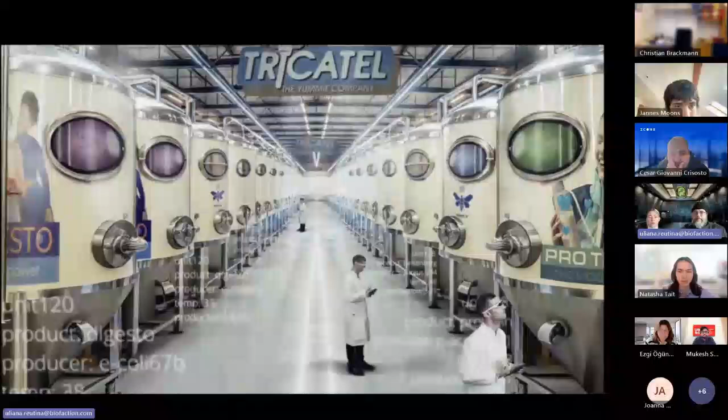Usually the fruits came in from rogue nations outside the Nogan Treaty, like Hungary and Italy. Most of the stuff was canned or in some way processed. In some rare cases, we found fresh but tasteless fruits provided by some clandestine indoor growers in the neighborhood. There was absolutely no reason to grow these fruits. Our solar food program could perfectly provide all the nutrients and proteins using efficient fermentation techniques and return wasted farmland into precious nature reserves.

People could eat everything in any form, but some people still insisted on the real thing, so much that they became criminals. Enforcing the Nogan Society kept us busy for almost 20 years. Spotting secret plantations via satellite, surveying smart meters and solar panels to find the indoor growers. A time-intense but mostly successful endeavor, until this very special day.

All of a sudden, they were found on every corner, fresh, tasty fruits that were exposed to a microbiome. Someone out there was growing them in real soil and in vast numbers. We were checking satellite data, smart meters in every house, dugouts at cemeteries. Nothing. A little later, with the help of our sophisticated interrogation techniques, we finally found out that all of it was closely related to a public laboratory.

Their clients came from all traits of life: academics, workers, artists, even politicians. The place was run by a group of former scientists, life science, agriculture, most of them without jobs since we went post-vegan. They called themselves, and what they did, Mi-Hy.

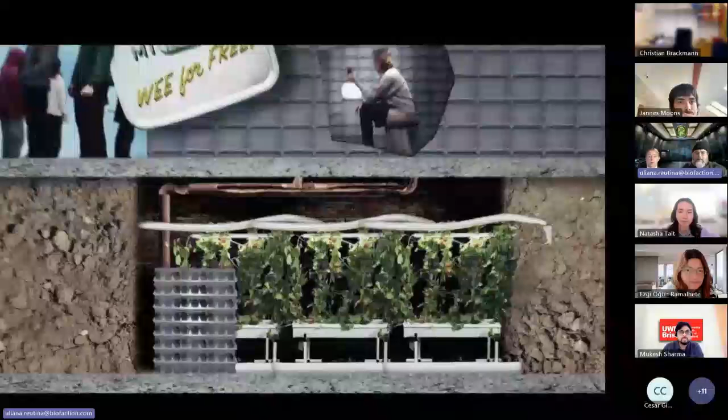We had to raid the place. Their hydroponic underground system was the most sophisticated our department had ever seen. They had created a microbial fuel cell that was able to make electricity from urine. Moreover, their bacteria digested the wastewater into nutrients to boost plant growth. Everything was transformed into a valuable resource.

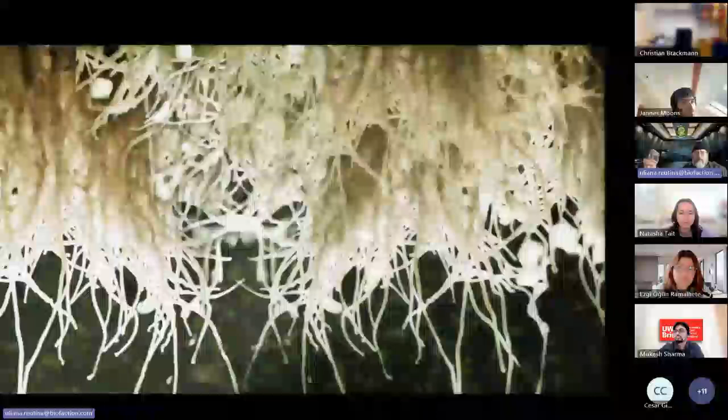We found out that they had totally fooled us. Due to the taste, we had been looking for someone growing plants in soil, but they had established a root microbiome within their hydroponic system, giving their vegetables a natural taste. A great success for our Nogan task force, we thought.

But as you know, lawyers. In court, they argued that due to the fact that their hydroponic system did not have any impact on the environment, it could not be seen as a violation of the Nogan Treaty. They came free.

Today, they are making a fortune, turning sewage sites around the world into organic restaurants. Having the illegal vegetables issue solved by Mi-Hy, resources are free for our task force to combat other crimes, yet unknown to mankind.

I hope you've been intrigued.

Let's get into details. First, we invite PhD candidate Natasha Tait, who is an expert in MFC technology. Natasha, what are these MFCs and how do they work?

Natasha, we seem to have some troubles with the sound. Do you hear us? We don't hear you. Are you able to hear me now? Yes, now it's fine. Thank you. Sorry about that.

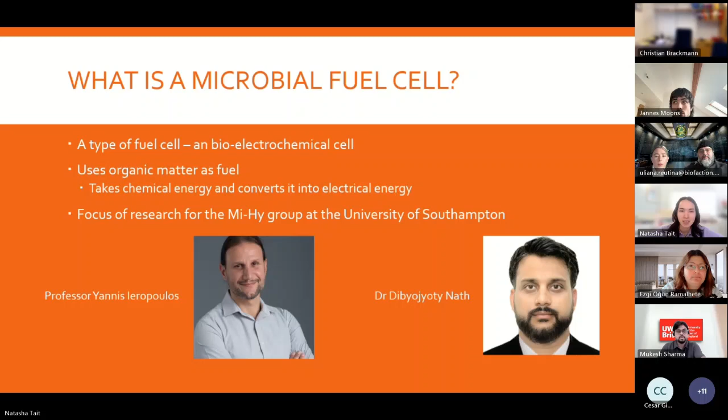To begin, the first MFC was written about in 1911 when Michael Potter showed how yeast can break down organic matter to produce electricity. He wrote: 'The evolution of caloric energy during fermentation or putrefaction is commonly recognized, and that electrical energy is also liberated during these processes is a conception of considerable interest.'

So today, more than 100 years later, a potential large-scale application of microbial fuel cells is in wastewater treatment. The idea being that you can take different waste streams, such as domestic waste, agricultural waste, industrial waste, and use them to extract electrical energy using microbial fuel cells.

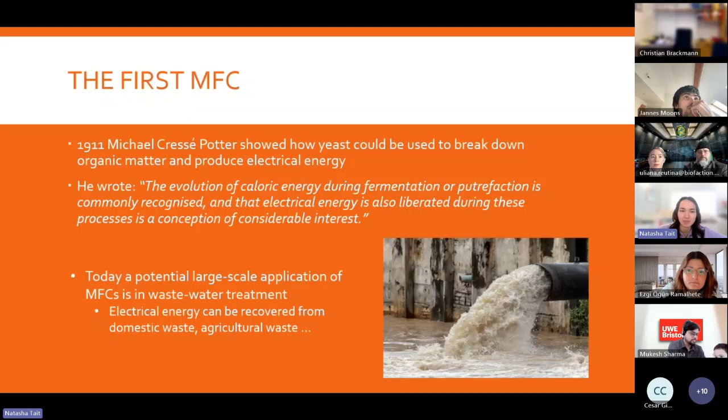So how would they actually work in SPIKA? How can they support a hydroponic plant growing system? Again, here the idea is that they will be fueled by waste, and the microbial fuel cells will generate electricity and offset the energy required by the hydroponic system, for example for the lights, the pumps, and plant health sensors. Additionally, another capability of microbial fuel cells is that they can recover compounds from waste.

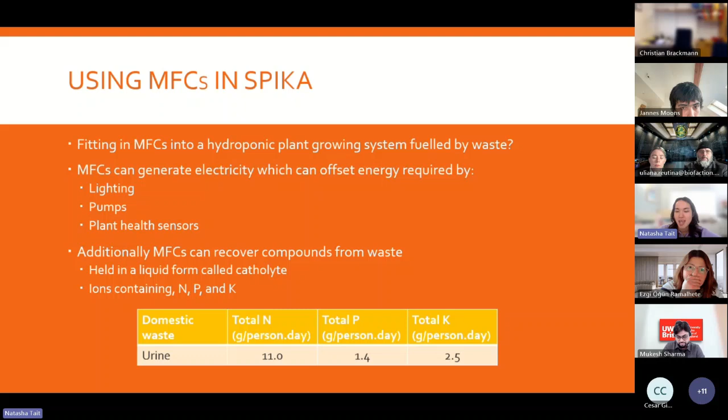These compounds are produced in a liquid form by the MFC, in a liquid that we call catholyte. We are particularly interested in recovering compounds useful for plant growth, specifically ions containing nitrogen, phosphorus, and potassium. For context, human urine per day can have up to 11 grams of nitrogen, 1.4 grams of phosphorus, and 2.5 grams of potassium.

So how does it work? How does an MFC actually produce electricity? Here on the right-hand side, I have a typical two-chambered MFC. In the left-hand chamber, the anode chamber, this will be filled with wastewater, which is rich in electroactive bacteria and organic matter. Electroactive bacteria is simply bacteria that can take an electron from inside its cell wall and transfer it to the outside.

So these electroactive bacteria are going to be breaking down all of the organic matter, producing electrons, and growing a biofilm surrounding the electrode, which we call the anode. All of these electrons that get produced travel to the other side, to the cathode chamber. This movement of electrons produces a current and allows us to power devices or store it in a battery.

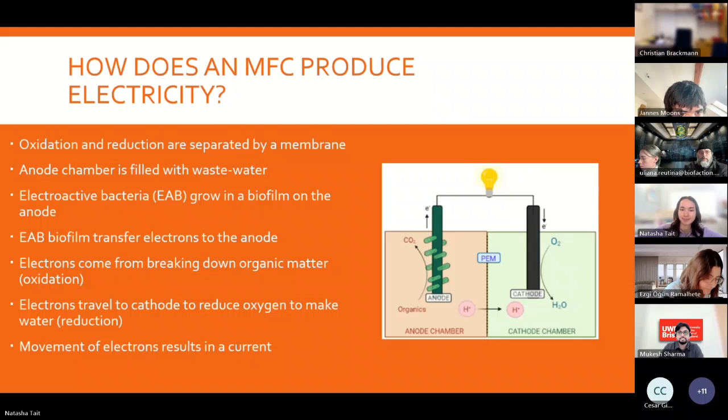So one of the goals for Team Mi-Hy at Southampton is a benchmark of producing 1 milliwatt of power per 1 milliliter of wastewater supplied to a microbial fuel cell. To do this, we are continuously developing membranes as well as electrodes. For the electrodes, we want them to conduct electricity, to support a biofilm for the anode, and be good at reducing oxygen for the cathode.

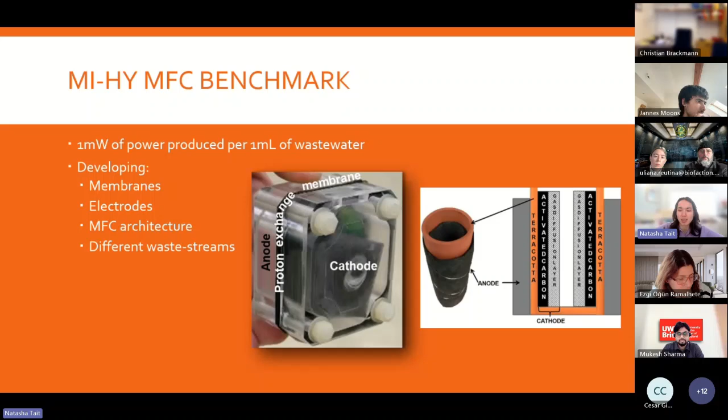And for the actual MFC architecture, we are always developing as well. In the middle, I have a typical sandwich design where there are 2 electrodes on either side of a flat membrane. But what we do in MI-HY is actually use a cylindrical design, where the whole external surface, or almost the entire external surface, is covered by an anode, and the internal surface of the cylinder is the cathode. This is really just to maximize the surface area that the biofilm will be in contact with the wastewater.

Natasha, what is this catholyte? How is it made? Is it different from the wastewater? Thank you for asking, I'll just get onto that.

Okay, so catholyte is produced because of several different processes in the MFC. To begin, charge in all electrochemical cells should remain balanced. So as electrons are moving from the anode chamber to the cathode chamber, there's also the movement of positive ions. In the picture, it shows protons, but any positively charged ions will also be moving from anode to cathode to balance the charge. Furthermore, with the movement of ions, there's also a process called electroosmotic drag, where water molecules are also dragged through the membrane. And finally, ions can also move during diffusion.

So all of this leads to a buildup of liquid in the cathode chamber, and we call this liquid a catholyte. So it is water-based and rich in many different ion types.

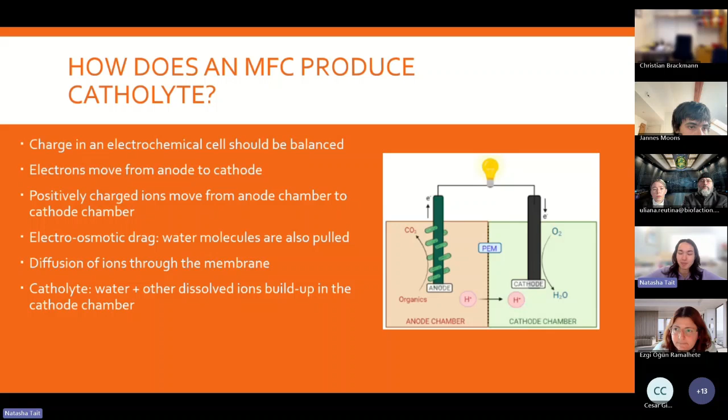In our lab, we have been experimenting with different kinds of feedstock. Here you can see we have collected catholyte taken from raw sewage, and also catholyte created from a synthetic urine lab recipe that we have. We have detected that we have managed to recover sodium, potassium, calcium, magnesium, nitrate, and phosphate.

But we still have to continue our development of membranes, as we want them to be really good at screening bacteria while also allowing ions and water to pass through. So the idea is that we can control the pore size during the kilning process of our ceramic membranes.

Another interesting property of this catholyte that we found is that it has antimicrobial properties. This is down to two elements: they can have high saline content just from the sheer amount of ions making salts, and they can also have quite a high basic pH, which inhibits the growth of bacteria.

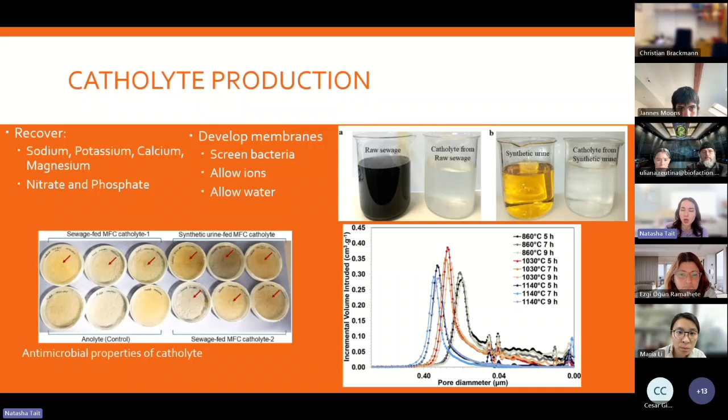Could I ask you one more question? Going back to the electricity output, to the energy—it sounds like it's a very low energy output. Is there a way to scale up MFCs to stack them together? Yes, thank you for asking.

To maximize both power and catholyte outputs, you can combine many MFCs together. Traditionally you might think, why don't you just make a really giant MFC? But actually it's best to again maximize surface area, and you can do this by combining many small cylinders together in one tray. They all share the same wastewater, but the surface area that biofilm will be in contact with increases. So in one tray, you have a lot more current being produced from the biofilm compared to just one MFC. Then you can stack many trays together and connect them in series to boost voltage and current, giving you a stacked system.

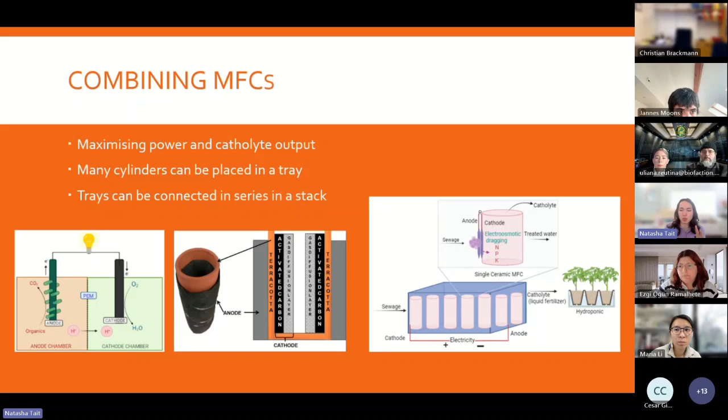You can extract all of the catholyte from the many cylinders to feed the hydroponics, and use that combined electricity to provide for the lighting.

Here in our lab, we have experimented with this. On the left, we have an example where we had raw sewage flowing down into two MFC trays, and the sewage was continuously recirculating through the two trays until the organic content had been greatly reduced. Then we start the process again and replenish the sewage. Here in the center of the slide, you can see that catholyte is starting to build up in the cylinders, so then we can extract that.

I will just show here a video also. We were able to power this 5-volt LED strip using another stack design—12 MFC trays combined together.

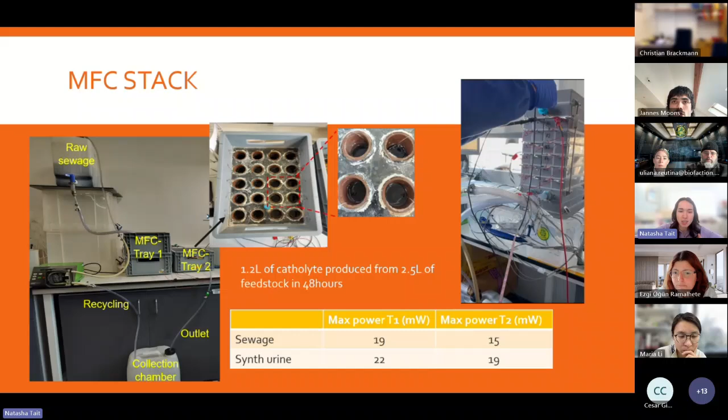Here I have some data showing that the maximum power for the trays, for the sewage-fed system, can be between 19 and 15 milliwatts. For the synthetic urine, which has a higher organic content, it's between 22 and 19. This is much greater than a single MFC, which we are aiming for 1 milliwatt. So we have managed to improve the power output.

We want to continuously improve catholyte production as well as electricity production.

So thank you for listening, and if anyone has any questions, I would be happy to answer.

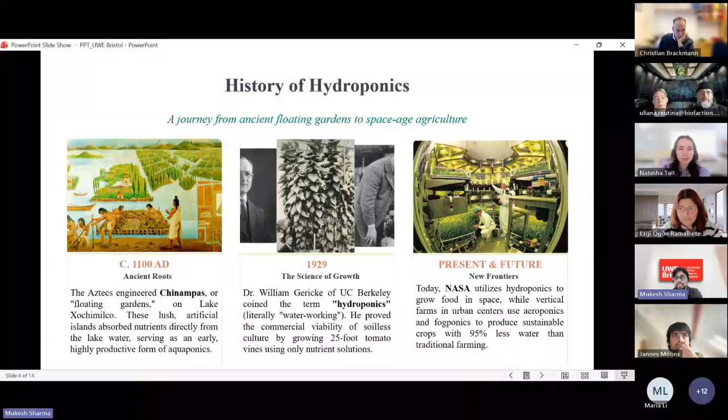In 1929, Dr. William Gericke, a professor from UC Berkeley, was the first person to coin the term hydroponics and to prove that plants can be grown commercially using hydroponics techniques. He successfully grew a 25-foot tall tomato plant just using nutrient solution. After that, there was no stopping. There have been a lot of studies by different universities and research centers, and even NASA is involved in growing plants using hydroponics techniques, to check whether this can be done in space to grow food there.

So what are the merits of hydroponics? The first and foremost important thing is water. Hydroponics makes efficient use of water. It usually takes 80 to 90% less water compared to traditional soil farming. Plants grow faster, with higher yields due to the controlled environments. The other thing is space utilization. Because it is done in a controlled environment, it uses much less space compared to conventional farming. It reduces pesticide use, enables continuous farming throughout the year in a protected space, reduces the land size and minimizes soil degradation.

So, how is this hydroponics against the principles of agroecology? First and foremost, agroecology involves soil, animals and other things. But in the case of hydroponics, it is the absence of soil, which breaks the link between the rhizosphere, farming,

and natural ecosystems. It reduces biodiversity, and hydroponics techniques involve high technologies, which is not the case in agroecology. It's a high energy consumption process, conflicting with agroecology's emphasis on minimizing ecological footprints. It has social disconnect and then nutrient cycles.

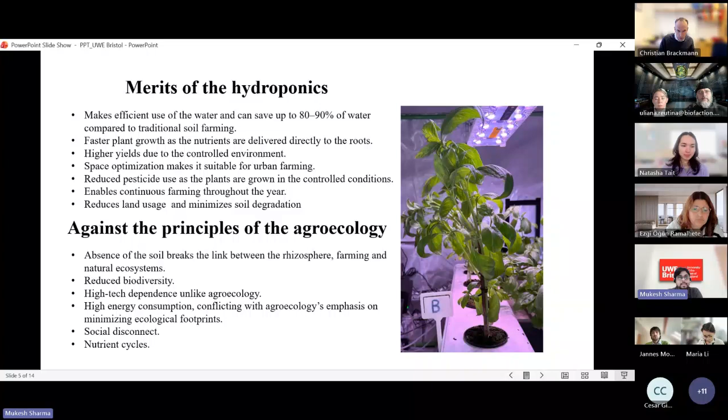So, how are hydroponics managed? Mostly we say that plants grown using hydroponics techniques are spoiled plants. This is because they are fed with all the things that they need. A sufficient amount of nutrition is provided. They get a sufficient amount of light, and we keep on manually refreshing the solutions regularly.

So this is why we consider that mostly the plants grown using hydroponics are spoiled plants. Although they look big and greener, they don't taste the same as plants grown using the soil system, and they have a bit less nutrition compared to plants grown normally.

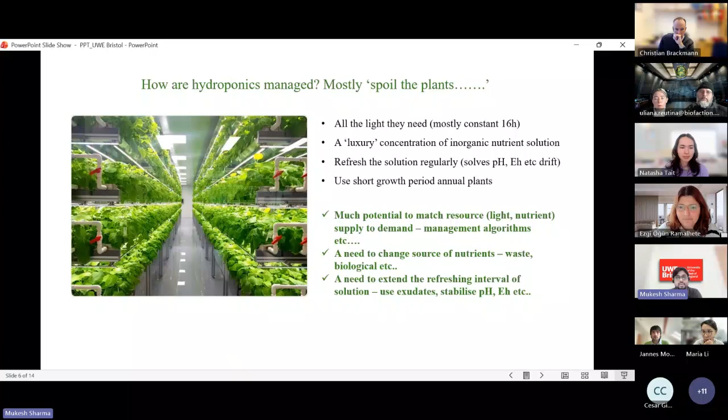Let's discuss briefly about microbial fuel cells. As you can see on the screen, we have a two-chamber microbial fuel cell. So what happens basically? We feed the wastewater in the anode chamber, and anaerobic digestion of the organic matter takes place. During this process, the protons pass from this side of the chamber to the other side, and to balance the energy, the electrons flow through the external circuit and we get the power.

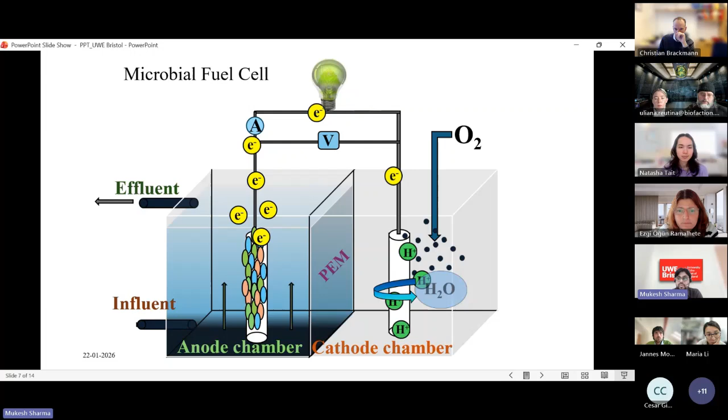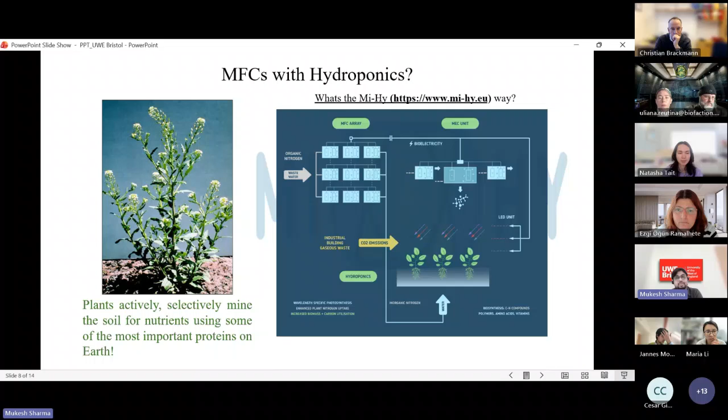So a microbial fuel cell does two things. It treats the wastewater and it also generates electricity. So in Mi-Hy, we are using a microbial fuel cell to treat the wastewater. At the moment, we are using sewage waste, and we are also generating electricity. The electricity generated from the microbial fuel cell, we are using in the hydroponics for different requirements that we have. So this is what we are doing in Mi-Hy.

Dr. Sharma, can I ask you, you're using this catholyte as feed for the hydroponics. How do you use it? How does it affect the plants? Yes, thank you so much for asking.

So normally, we provide inorganic nutrients to the plants, but in the case of the microbial fuel cell, we are treating the wastewater, and we are trying to replace the inorganic nitrogen with organic ones, right? So the catholyte that we obtain from the MFC, we use to provide nutrition to the plant and replace the inorganic nitrogen.

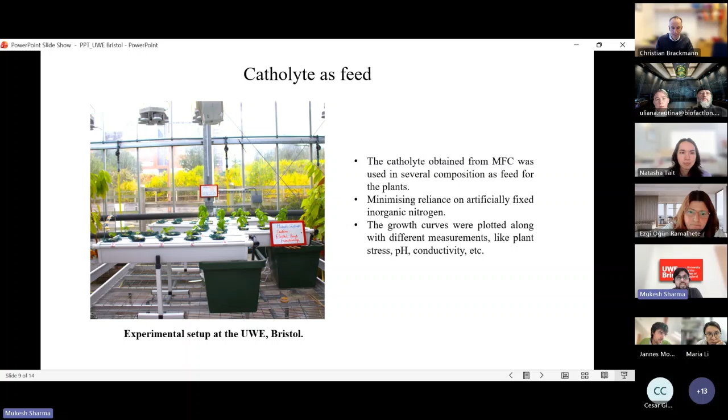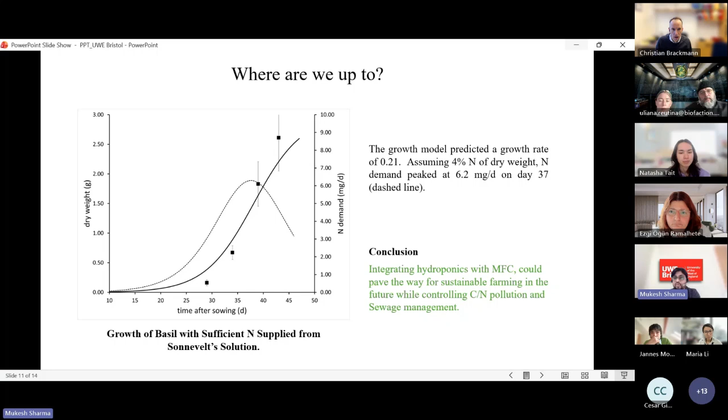So the current setup that we have at the University of West of England, we are really focused on optimizing the power consumed. So basically, in case of hydroponics, a lot of power is consumed to manage the water circulation system, the irrigation system, and other things which are involved during the operation. What we are trying to do now is optimize the light algorithm.

And so we are trying to reduce the power consumed not just by the light, but also we are trying to focus on circulating the nutrient solution. So we don't want to keep the pump on all the time. So what we are doing is we are placing some timers, and we are switching on the pumps, aeration pumps and the water pumps, for specific time intervals, so that we can control the entire energy consumption. And the most important thing is, just like our colleague Natasha said, we are producing a good amount of power using the microbial fuel cells.

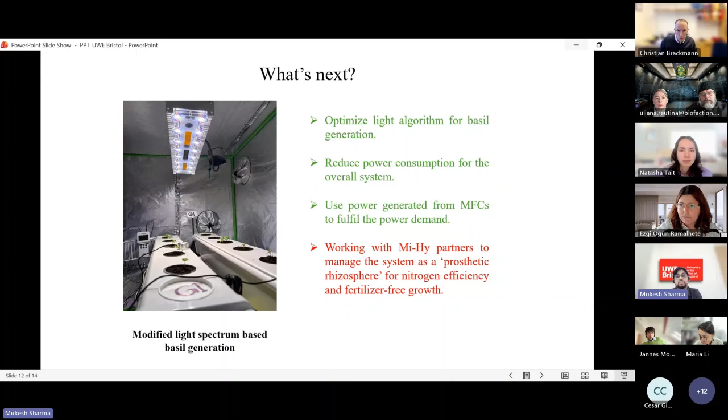So what we are doing at UWE is we are trying to design a system in such a way that we could fulfill most of the energy requirement from the energy obtained from the microbial fuel cells. So there are different sensors involved. There's the light that I'm showing. So we are trying to design the entire system in such a way that we can fulfill the maximum energy requirements with the microbial fuel cell, or if needed, complement the energy requirement with renewable sources of energy. Yes, so this is how we are working on this.

So we have presented our work in different places, and the most important one at the moment is in Milan Triennale. So I have discussed the setup that we have installed at the Milan Triennale in this video. Yeah.

Ezgi, can you play the video for me? I'm playing. Okay. Just a second. Yes. Sorry. Should I stop sharing my screen? Oh, okay, it will happen now. Just a sec. In our studio, we don't really have the sound. I don't think we'll have sound. Maybe you can try sharing. Okay, so let me try doing it myself from here. Please let me know if you can hear the sound. Can you hear the sound? No, we don't have the sound. Okay, so I will try one more time. Just a second.

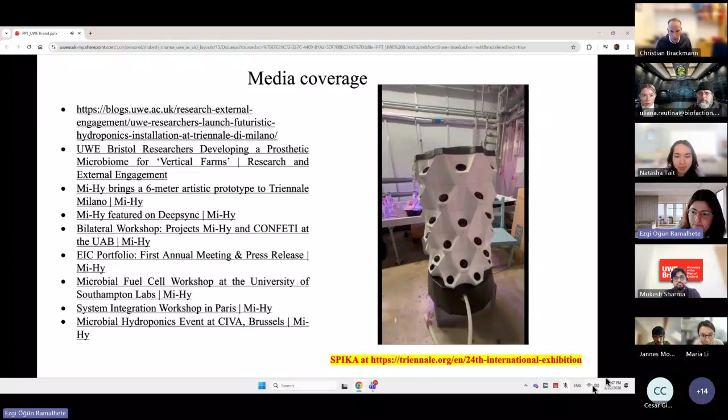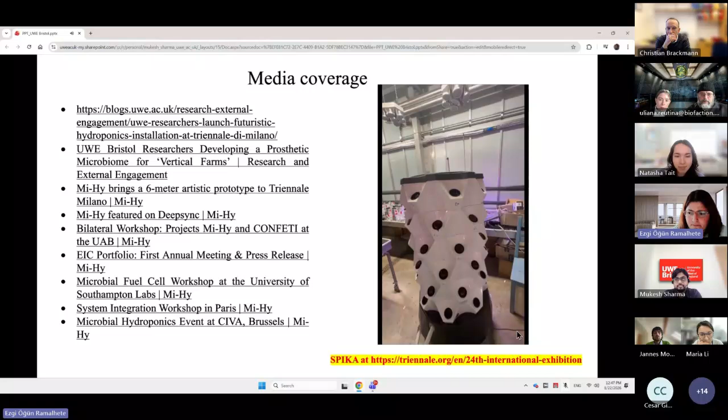We had a similar structure installed at SPIKA in Milan, Triennale, Italy. As you can see here, we have 7 layers and each layer contains 8 holes where we can put pots, and this is how we just started growing some basil plants. You can see here that they just started sprouting out, right? And if you see here, you can put a total of 56 pots.

As per requirement, we can reduce a layer or maybe increase it too. So when we buy, normally we get about 8 layers, so we have a provision of placing around 64 pots, but we can vary as per the requirement.

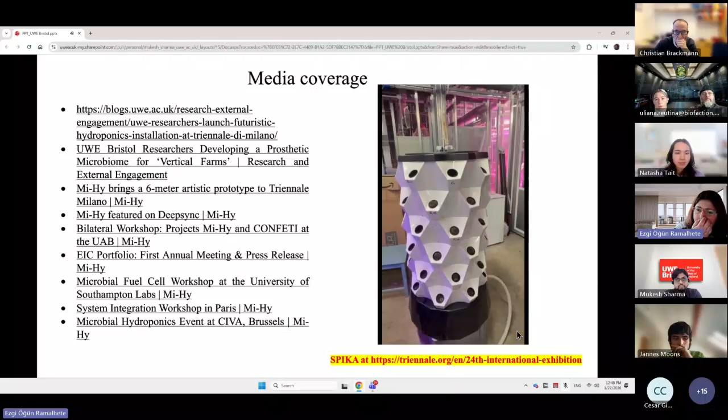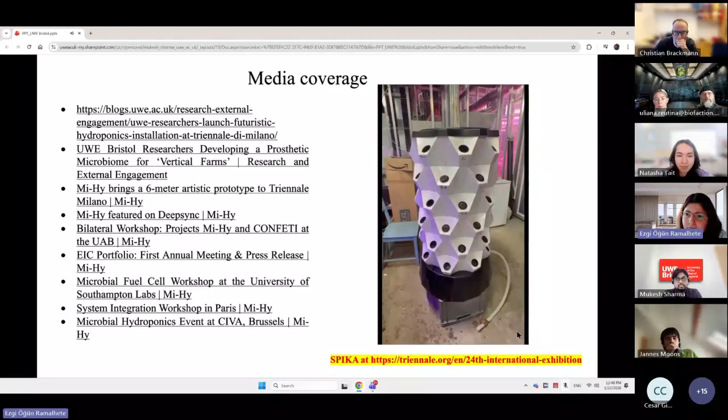At the bottommost part, you can see here, this is a 40-liter tank. So what happens basically, we can fill this tank with 40 liters of water and we can mix the nutrient solution as per the requirement. This one, as you can see, is the lid. So we can open the lid, fill the water and then close it as per the requirement.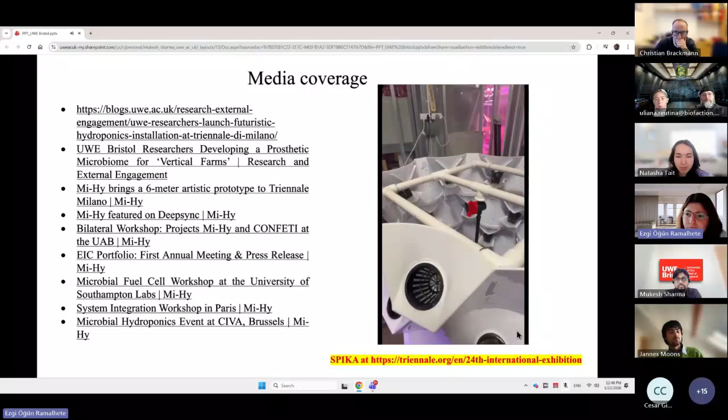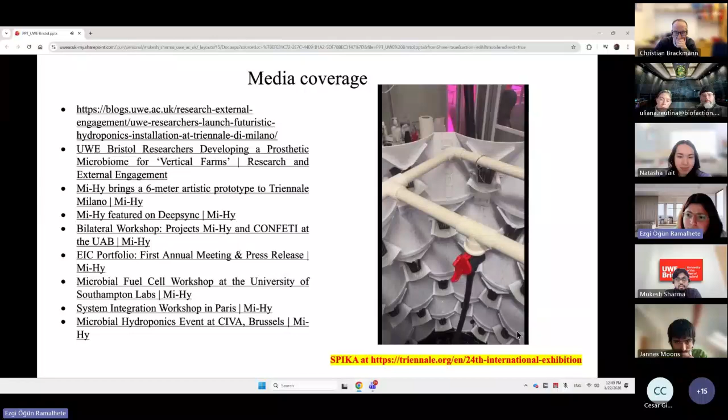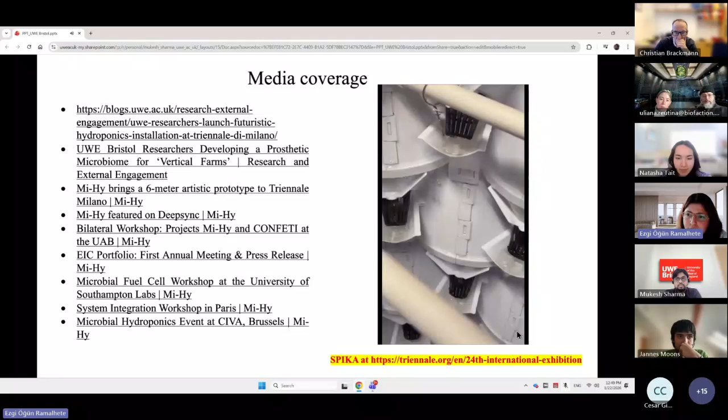To show you how the water cascades from the top to the bottom, let me just open the lid for you. As you can see here, we've got these pots where when the plants grow bigger, the roots come out from this. So this system provides water to the roots, and through this tray kind of structure, you can see that the water cascades down to the bottom, and it gets recycled. This is a very intelligent system made in this hydroponic tower, which really makes it very useful.

At the moment, just for the demonstration, I've connected it directly without any timer, but we can time the pump as per the requirement and the way we want to provide the nutrient solution to the plants.

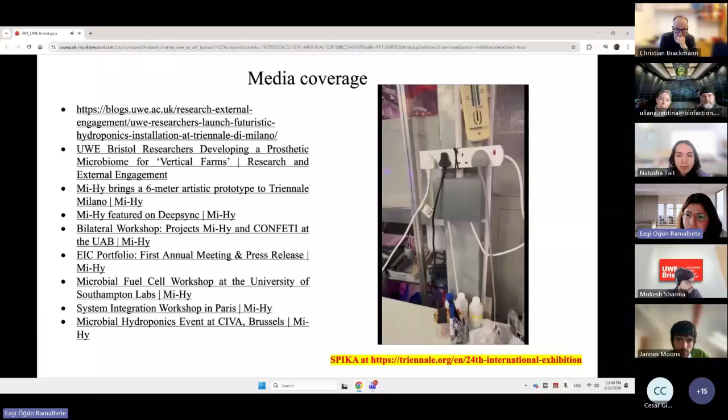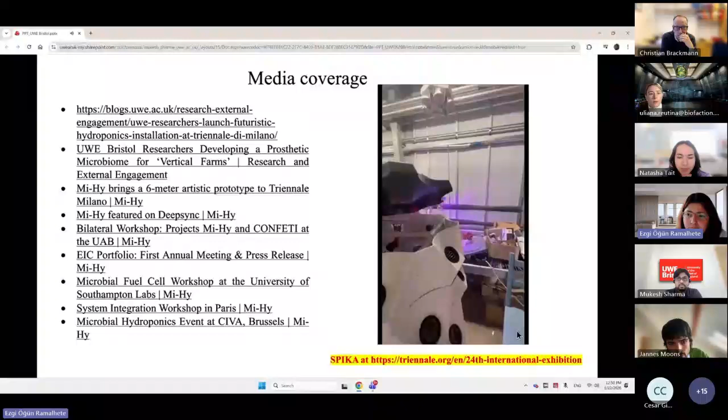This is the hole made in the tank so that we can connect this pipe to a bigger tank, which gives us flexibility to provide the nutrition to the plant for a longer duration of time without worrying about the tank being empty. We prefer keeping the tank closed all the time because we want the plant roots to be in the dark.

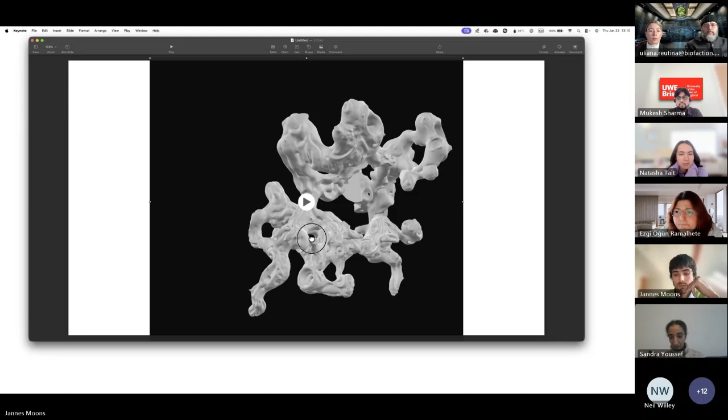So then we ended up cutting it into multiple pieces, as large-scale 3D prints are still not as easy as you might think. This was a bit the approach, the method, to 3D print the bigger sculpture.

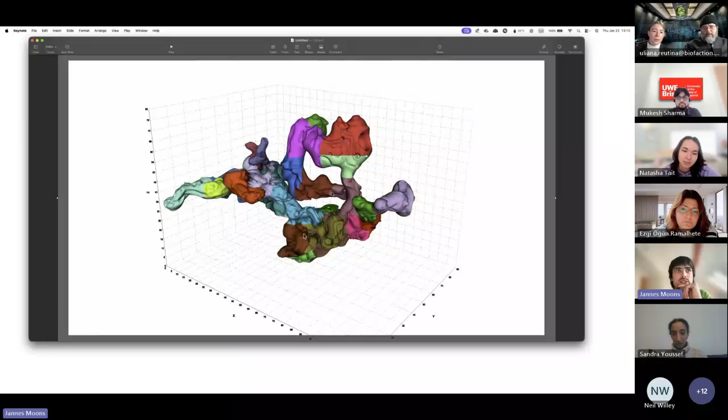That's it. Thank you so much for listening.

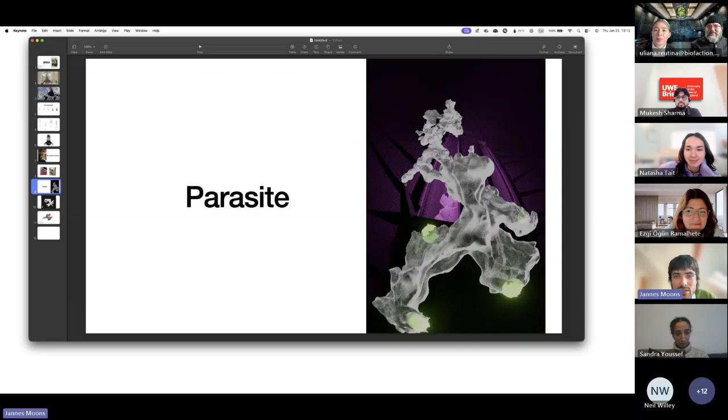Ooh, 80. Yeah, 80, which then individually had to be glued and connected. So yeah, I definitely had fun with it. Must be very hard work. I can imagine. Yeah, a lot of sticky fingers, I'll put it like this. Also finding the right glue to connect the printed material.

Exactly, yeah, some glues interact better. You get a kind of cold welding by a chemical reaction of the plastic with the glue. So of course, if you want to make these things load-bearing or structural, you have to think about this, because once the seam breaks, your whole structure is basically useless.

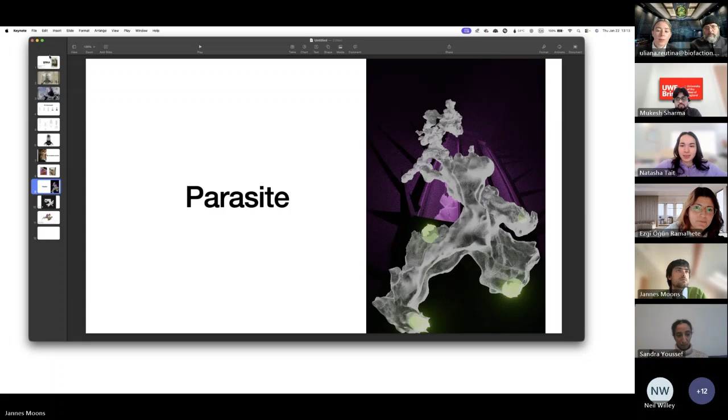Natasha? Yes, I just wanted to ask, I think the design of the parasite is really, really amazing. I wanted to know, did you come up with that entirely of your own making, or is it based on an actual living parasite? Does something really look like that in the real world?

There was definitely some inspiration. At first, it's a design I sculpted myself from scratch, but as every designer, you need some inspiration. In the narrative of SPIKA, we believed that this kind of hostile medieval structure could use a similar approach to churches, or as Catholics use gargoyles. For anybody who doesn't remember, a gargoyle is like a little creature that protects the church from evil and diverts water from the church, which resembled a bit this mythological creature that is also in symbiosis with the building by diverting the water, but also protecting it from anything not allowed. This was a bit the starting point. And because we were talking about microbial technologies and architecture and living architecture, this got translated into a parasite that would resemble something similar. So I hope that's an answer to your question.